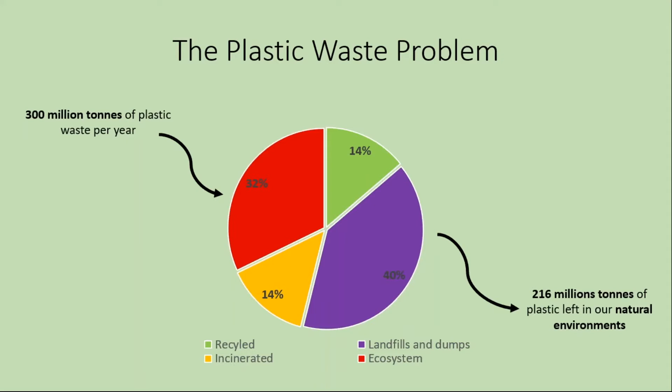72% of this plastic waste ends up in our landfills and ecosystems, with 14% being recycled and 14% being incinerated. Incineration of plastic is by no means sustainable, as more than 150 million tons of annual carbon emissions arise from this alone. Another environmental issue which requires serious attention is the depletion of natural river sand as a result of the ever-increasing demand of concrete, as shown on the next slide.

Around 30% of concrete comprises of natural sand. Some of the major consequences stemming from this overexploitation are the increase of the depth of our riverbeds, the lowering of the water table, and the intrusion of salinity into rivers. Not only does the use of sand in concrete affect the rivers themselves, but the transportation and mining of sand is also detrimental to the environment.

A new and emerging sustainable solution, which responds to both of these issues, is the use of plastic waste as a partial replacement for sand in concrete. Two different types of recycled plastic waste were used in this study, Resin8 and PET, as shown on the next slide. Resin8 is an innovative plastic aggregate which incorporates all the different types of plastic. PET is the most common type of plastic, and research has shown that PET is the most suitable type of plastic when used as a partial replacement for sand in concrete. It is for these reasons that Resin8 and PET form the basis of the study. Next slide, please.

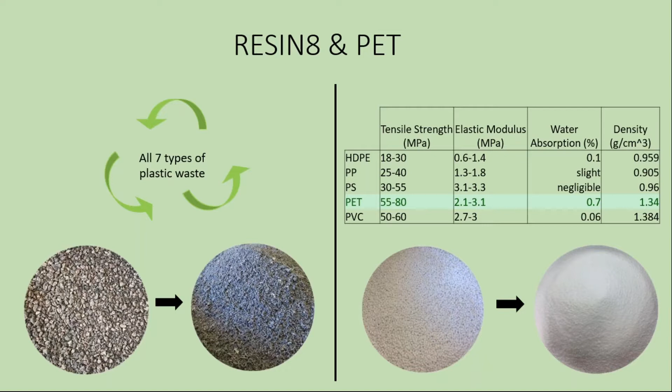Through the analysis of various articles, it is evident that the type of plastic, particle size, and replacement content influence the performance of concrete. At high plastic replacement content, it is found that there was a drastic decrease in the mechanical and durability properties of concrete. It is for this reason that Resin8 and PET were tested at small replacement contents of 5, 10, and 15% of sand by volume.

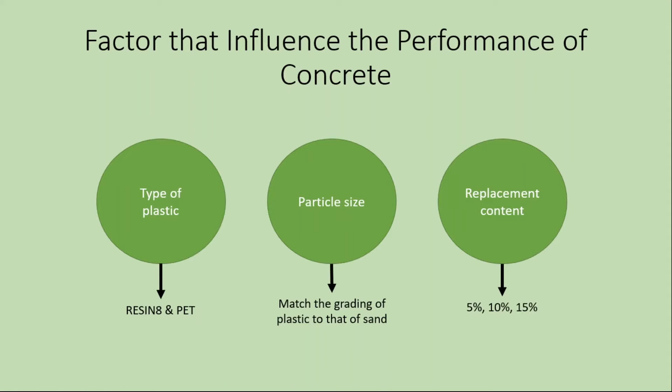The particle size and size distribution of the different plastics was also carefully considered, as it is important to match the grading of plastic to that of sand. The grading and surface morphology of the recycled plastics are shown on the next slide. As seen on the grading curve, PET achieved a grading very close to that of natural sand, which is very desirable. With regard to the surface morphology, Resin8 is seen to be a more heterogeneous material, while PET is seen to be a more homogeneous material.

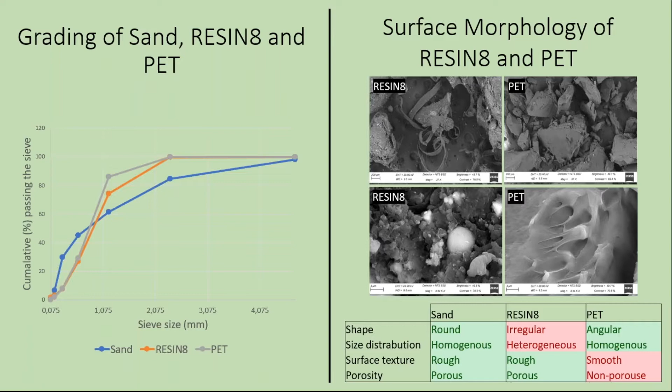Next slide, please. A number of different tests were performed to determine the workability, mechanical, and durability properties of the different concrete mixes. For each test that was performed, the concrete that contained the recycled plastic waste was tested against a reference mix, which contained no plastic. Some very interesting and exciting results were obtained.

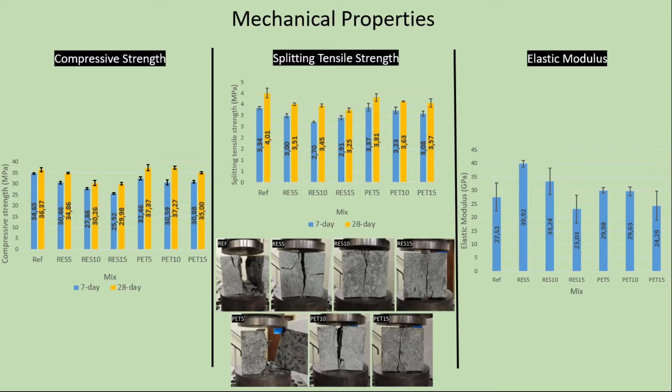The mechanical properties of the concrete mixes were determined by the compressive strength test, splitting tensile test, and static elastic modulus test. Looking at the compressive strength results on the next slide, it is seen that when compared to the reference mix, PET up to a replacement content of 10% increased the compressive strength of the mix. Importantly, all mixes were above the threshold for structural concrete in terms of compressive strength. This has the potential to save a huge amount of plastic, as both Resin8 and PET can be incorporated in concrete up to a replacement content of 15% and be used for all infrastructure.

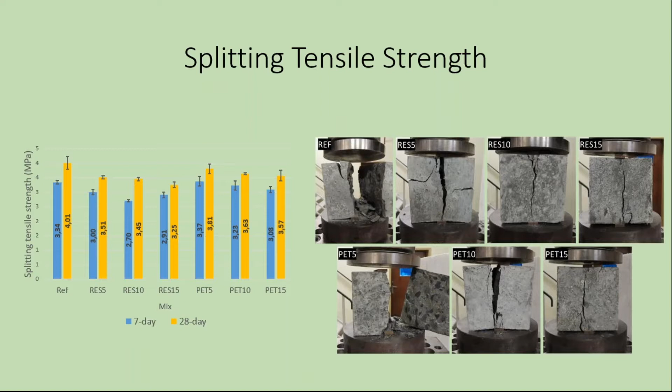Next slide, please. In terms of the splitting tensile strength test, incorporating PET at all replacement contents exhibited a stronger splitting tensile strength than Resin8 at a replacement content of only 5%. It was found that when the plastic content increased, a more ductile failure occurred, which is desirable. The elastic modulus results are shown on the next slide, and it was found that there was an increase in the elastic modulus of the concrete when incorporating Resin8 and PET up to a replacement content of 10%.

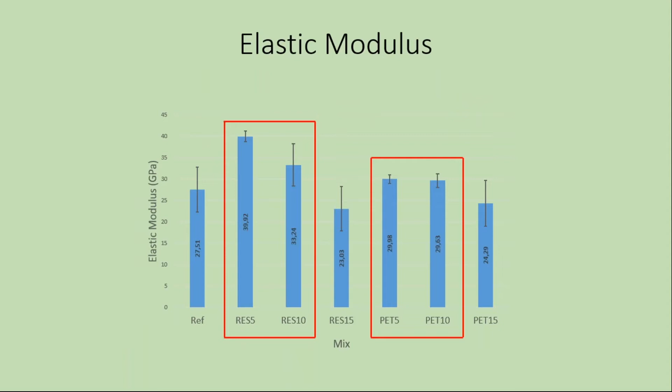Next slide, please. The durability properties of the concrete mixes were determined by the oxygen permeability index test and effect of elevated temperature test. The OPI test gives a measure of the resistance of the concrete to ingress of gases, liquids, and ions. PET was found to increase the OPI at a replacement content of 5%.

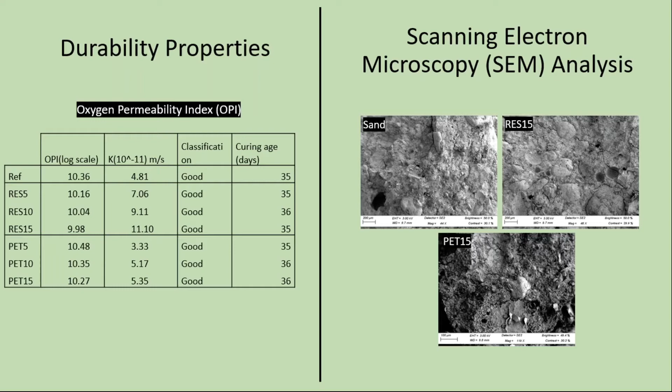The scanning electron microscopy analysis was performed to determine the surface morphology of the mixes, the interfacial transition zone, and the effect of elevated temperatures. Shown on the screen is an indication of the air void content in the different mixes, which in turn affected the strength of the concrete mixes. Next slide, please. In summary, it is clear that both Resin8 and PET are suitable as partial replacements for sand in concrete.

When looking at the overall performance of the concrete mixes, the optimum replacement content of resin 8 was found to be 5%, while the optimum replacement content for PET was found to be 10%. There is 10 billion tons of concrete produced every year. Incorporating plastic waste at a replacement content of 10% of sand by volume has the potential to divert 6.1% of the total amount of plastic waste produced every year for sustainable use in concrete.

It is also important to reiterate that both resin 8 and PET can still be used at a replacement content of 15% for structural concrete, meaning there is the potential to divert even more plastic waste from our landfill sites and ecosystems. The concrete which incorporates recycled plastic waste can also be crushed and reused at the end of its lifespan, meaning this recycling process is fully circular. This sustainable solution can thus be a huge step in combating the plastic waste crisis.

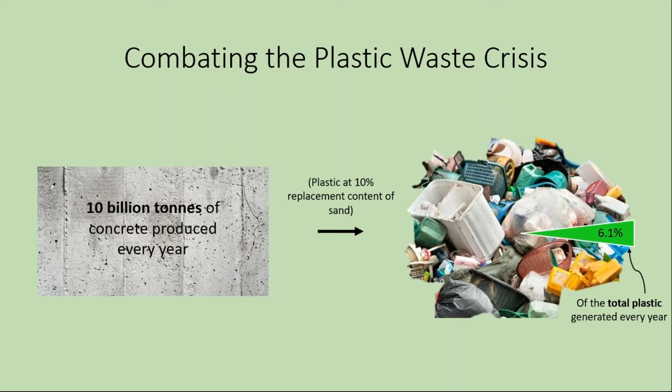Next slide, please. In South Africa's socio-economic context, there is the potential to create thousands of job opportunities, while the concrete that incorporates the plastic waste can be used to build fundamental infrastructure, such as homes, hospitals, schools, and roads. In responding to the plastic waste crisis we are currently facing, it is critical that any and all sustainable solutions are implemented with immediate effect. If we do not act now, the ramifications will exceed the boundaries of what human intervention can achieve. Thank you.

Thank you, Nina. That is very, very relevant and really close to our hearts on getting rid of a lot of the plastic waste.

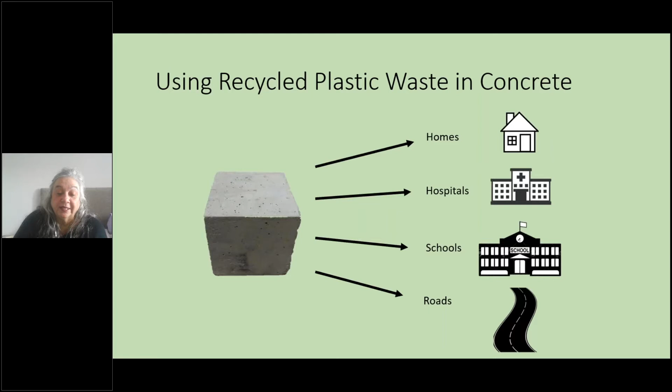Okay, we'll go on to the second place winner, who was Andrea Fiorita from North-West University, and he will present on the topic of industrial LED fixture. Andrea completed his bachelor's degree in computer and electronic engineering at North-West University in 2021. He's now busy with his master's degree at NWU. He loves the outdoors and gets on his mountain bike whenever he can. Hiking trips are also his perfect escape and a great way to behold the beauty of God's creation. And again, you can see the love of nature and the love of earth coming through. So, Andrea, over to you.

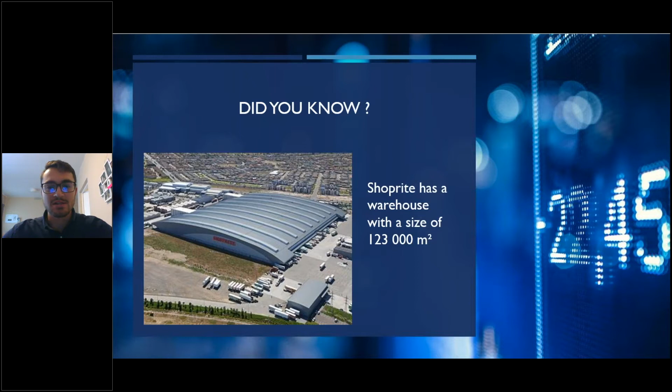Cool. Hi, everyone. I'm Andrea Fiorita, and I will be presenting the industrial LED fixture. Next. So, did you know that Shoprite has a massive warehouse with a size of 123,000 square meters? By doing a few calculations, you can calculate the energy usage of such a large factory. Next. From literature, you can see that such a large space uses almost 22.6 kilowatt hours per square meter annually, just on lighting energy costs. And with an electricity cost of R1.40 per kilowatt hour, you can calculate the amount. Next slide.

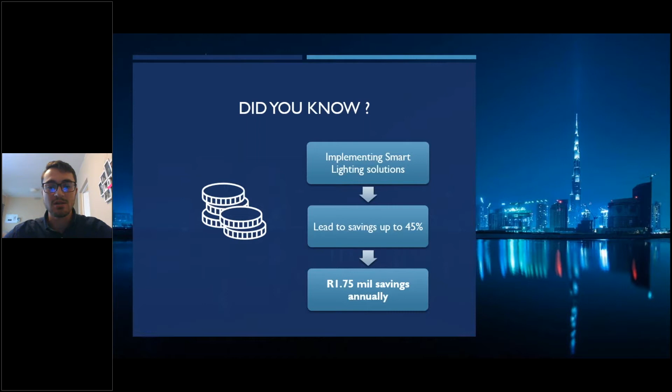So this all equates to almost 4 million rand annually just on lighting energy costs. So how can you save on energy? Next. You can implement a smart lighting solution, which can save you up to 45% on energy costs. And taking the previous example into account, it can save almost 2 million rand annually just on lighting energy costs. Next.

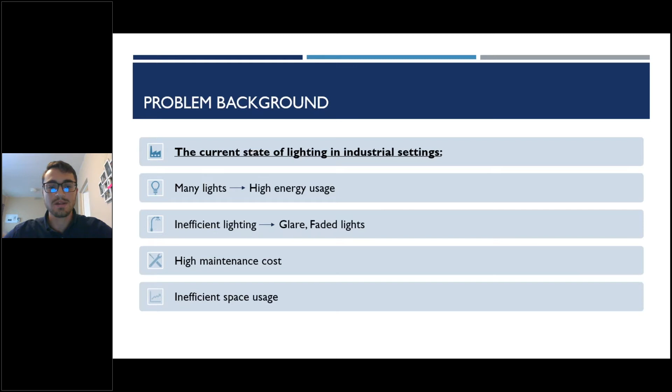So what is the current state of lighting in industrial settings? Well, firstly, there are thousands of lights, and each light uses a significant amount of energy. Then there's also inefficient lighting, such as glare and faded lights, which would decrease the productivity of employees. There's also a high maintenance cost associated with the current lighting schemes. And there are also, in such large spaces, places that are lit up but not even being utilized. Next.

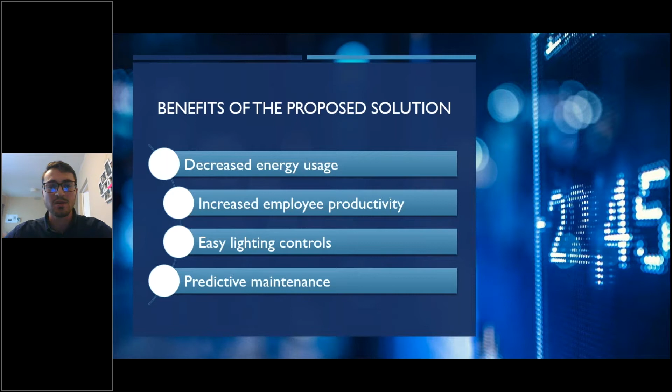So what may be the possible benefits of the solution? Well, mainly there'll be a significant decrease in energy usage, which should save on electricity bills. Then there's also an increase in employee productivity because the lighting is more user-centric. It also enables an operator to easily control the lighting in any environment. And lastly, it also enables predictive maintenance to save on the significant costs associated with corrective maintenance actions. Next.

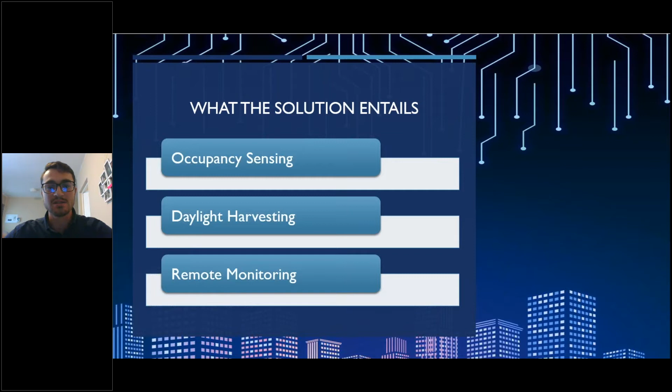So what would be the solution? Next slide. Well, the solution uses 3 techniques to save on energy. First, there's occupancy sensing, then daylight harvesting and remote monitoring. This will be discussed in the next slide. As you all may know, occupancy sensing is when a space is occupied, the lights are on. When a space is not occupied, the lights are off, meaning a significant amount of energy is being saved. Next.

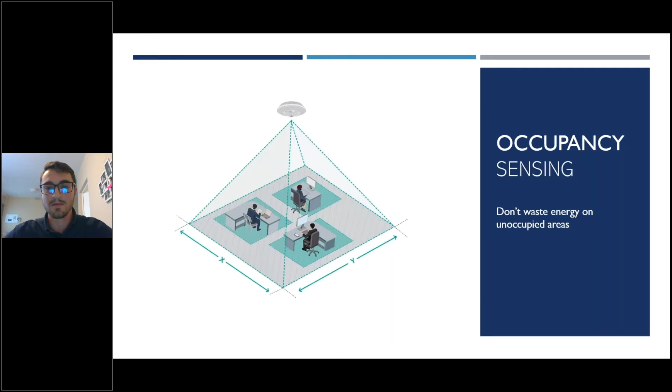Then there's also daylight harvesting. Daylight harvesting means that you utilize the incoming light from windows or a skylight to adjust the lighting in a certain space. So if there's a significant amount of light that comes in from windows, you don't have to use that much power on the lights. Next.

There's also remote monitoring. So this will enable an operator to easily control the lighting scenario in such a factory setting. You can also view system parameters from a remote location and adjust the parameters from any global position. Next.

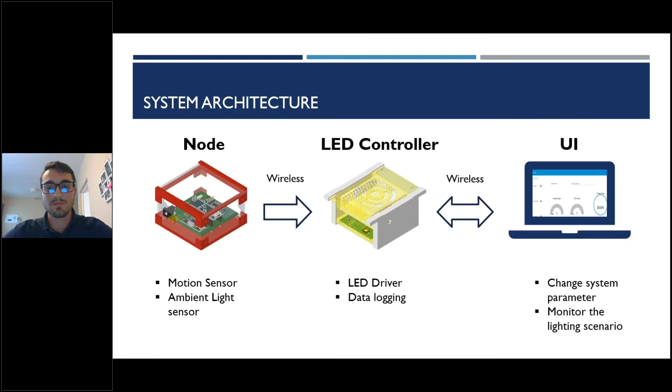Okay, so what is the system architecture? Well, it consists of a node, an LED controller, and a user interface. The node senses motion and ambient light. It sends these readings wirelessly to an LED controller. The controller will use these readings to dim the LEDs, and it will also log the data. It forwards the readings to a user interface. The user interface allows you to change system parameters and monitor the current lighting scenario. Next.

So with a focus on the sensory node, it has a range of 7 square meters and would typically be mounted on a workbench or wall. The motion sensor has a 360-degree detection range, and the communication interface also has a 10-meter range. Next.

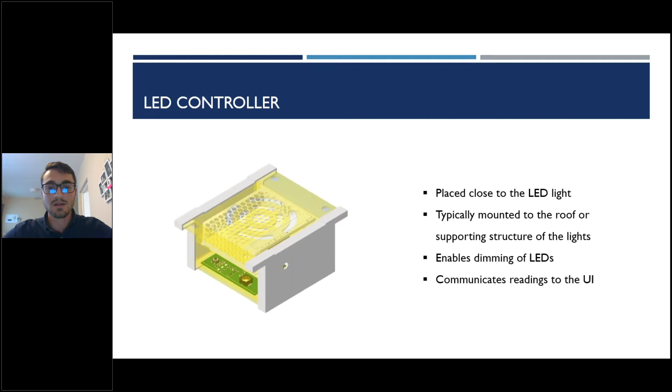Then there's the LED controller. The controller's main function is to dim the LEDs, and it would typically be placed on the mounting structure close to the lights. It communicates the readings to the user interface. Next.

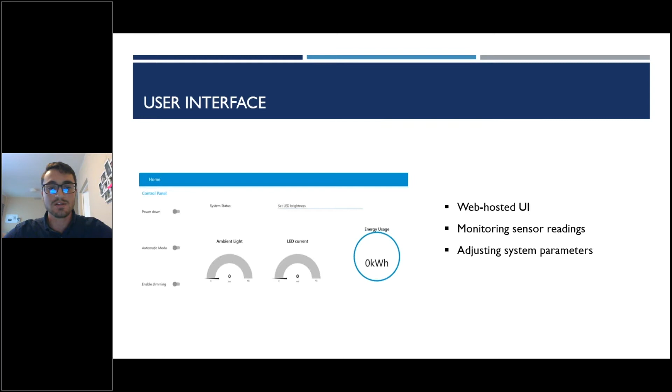So the user interface is a web-hosted user interface where you can monitor certain system parameters such as the ambient light and the current energy usage. You can also adjust certain system parameters such as the LED brightness. Next.

So yeah, to conclude, the LED fixture is a feasible option for any company looking to save on electricity bills. This is made possible by means of occupancy sensing, daylight harvesting, and remote monitoring. Next.

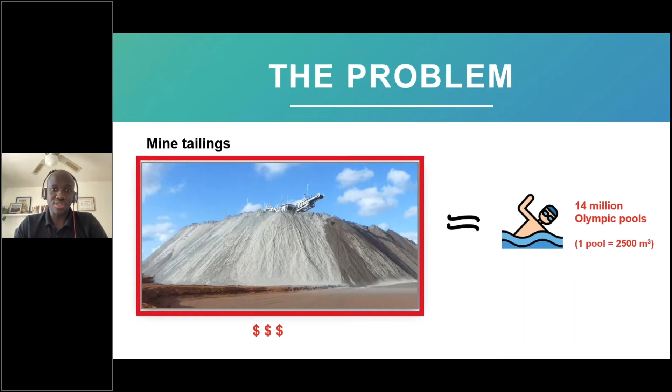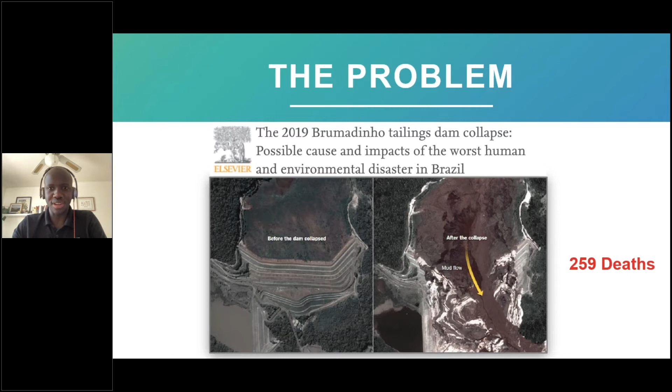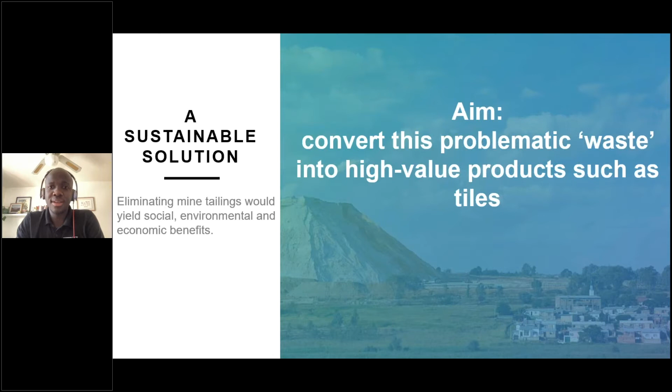On the next slide is an example of the catastrophic failure that regularly occurs. In 2019 in Brazil, 259 people died due to a tailings storage facility failure. The current solution is unsustainable due to the fact that these facilities need to be managed forever, and management does not eliminate risk. As shown on the next slide, the status quo is unacceptable. So my aim with this work is to convert problematic material into valuable products, thus providing a solution that meets the sustainability triple bottom line. The chemical process I use to do this is laid out on the next slide.

Geopolymerization leverages the unique chemical properties of mine tailings. Adding an alkali solution of high pH and curing at slightly elevated temperatures triggers a reaction that bonds the loose tailings material into a solid stronger than cement.

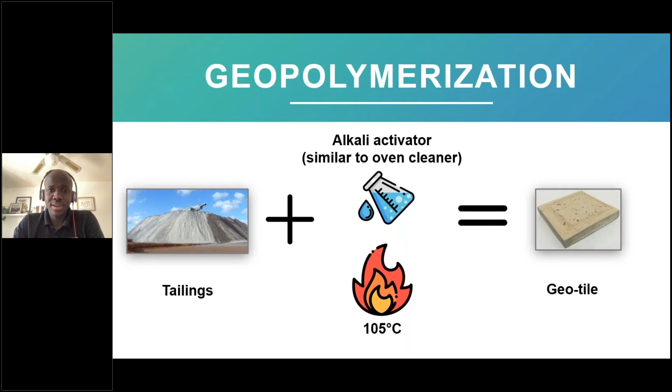The next slide overviews how I used this process to meet the objective. I'll begin with how I made the geotiles, the design chart I developed to meet the criteria, and then the testing methods that I employed.

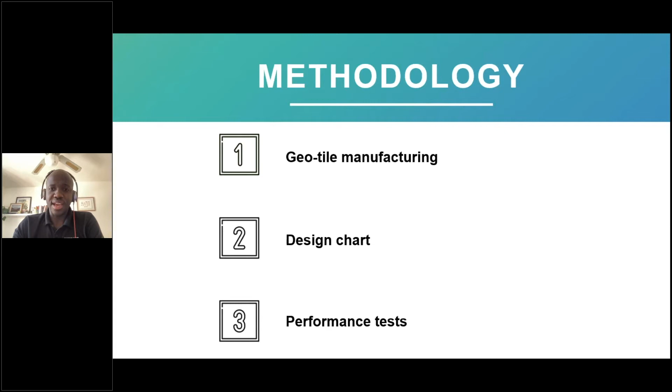The manufacturing process comprises 3 broad steps: mixing the tailings with a solution of sodium hydroxide, shaping the mixture with a hydraulic press, and then curing the tile in an oven.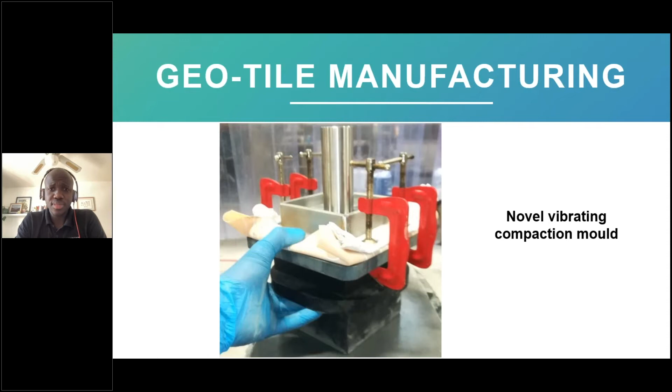On the next slide is the design chart I used to ensure that the tiles meet standard specifications. Everything to the right of the green dashed line meets the American standards for breaking strength, whilst everything above the red dashed line meets South African specifications for a calculated value called the modulus of rupture.

The blue lines predict the theoretical performance of tiles based on their thickness. This value is given in millimeters.

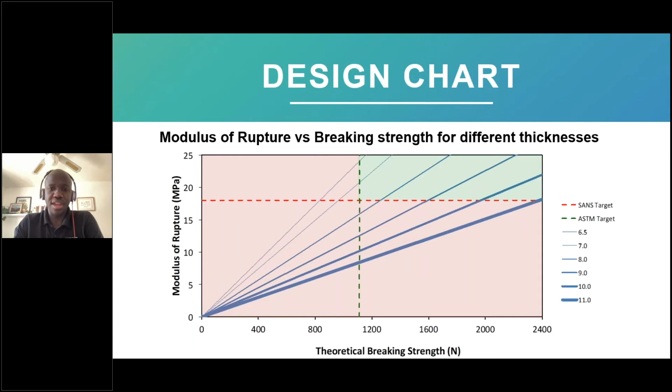Different tiles made will fall on this plot, and to achieve technical feasibility, we want a tile that falls in the green region at the top right of the plot, as that indicates the condition where both standards are met. To plot tile performance on this chart, the next slide shows the tests I employed.

Technical feasibility was measured by the breaking strength test, water absorption, and abrasion resistance tests, which I'll describe in a bit more detail in the next slides.

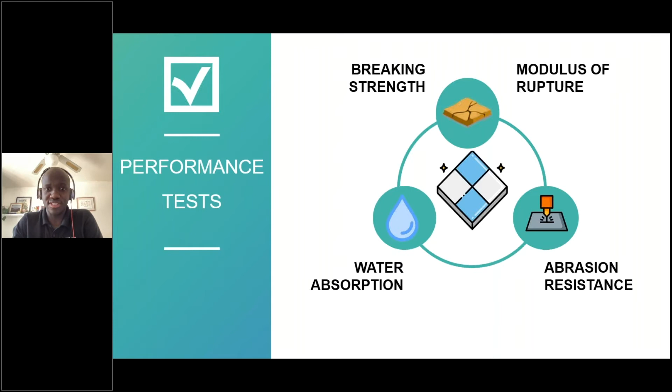Breaking strength is straightforward: you press down on the tile and measure the force to break it. This gives the breaking strength, and using a formula, you can calculate the modulus of rupture.

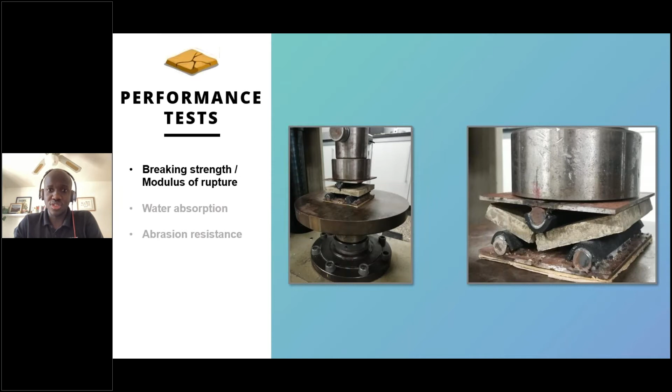Finally, the next slide shows the abrasion test. Sand goes into the white funnel at the top of the picture in the middle, and then pressurized air blasts the sand onto the tile at the bottom that's placed beneath the nozzle.

Results from this test show on the right that curing the tiles in the oven for 1 and 2 days did not meet the specifications, and that's why there are holes in those first 2 tiles. However, 3 days curing provided sufficient strength.

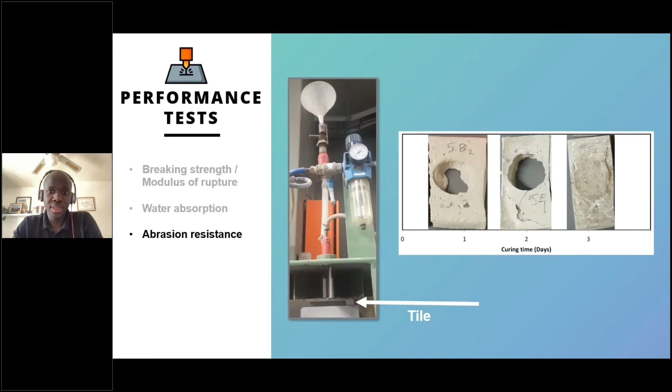In the next slides, I'll present the results of the previous 2 tests. I first found out how long the tiles needed to cure for. Immediately, we see that none of these tiles fell in the target region.

The square tile cured for 1 day met neither specification, whereas the 3, 5, and 7 day tiles beat the green American target line, but fell below the red South African target line. The triangular 3 day tile, however, is closest to the green target region in the top right.

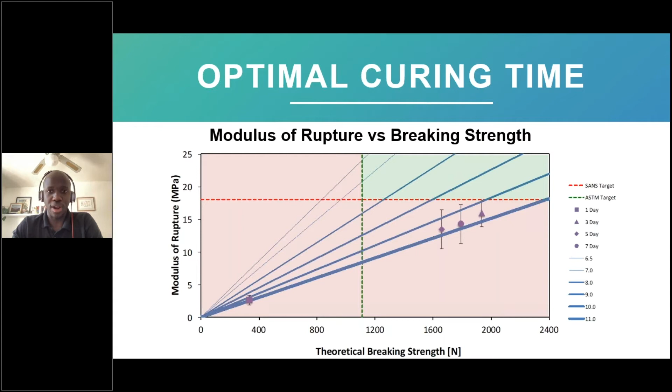The next slide shows what happened when I varied the tile thickness. We can see that neither of these 2 thicknesses fell in the green target region.

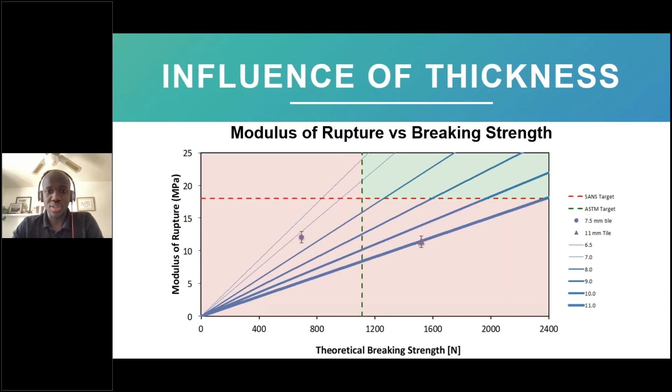I'm currently investigating other variables to produce geotiles that fall more comfortably within the target region for my master's research. Nonetheless, the results show that technical feasibility has been met.

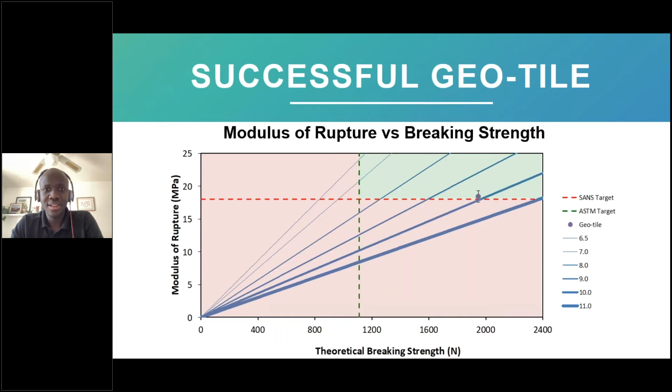So far, so good. But the real question is if we can make money from these things, which I'll address next. To answer this, I developed an economic model to compare geotile profitability to that of conventional tiles.

The primary material comprising a geotile is the mine tailings, which I've assumed to be free for this analysis. This is conservative because mines would be happy to have someone take the tailings off their hands. The costs I did consider are shown on the next slide.

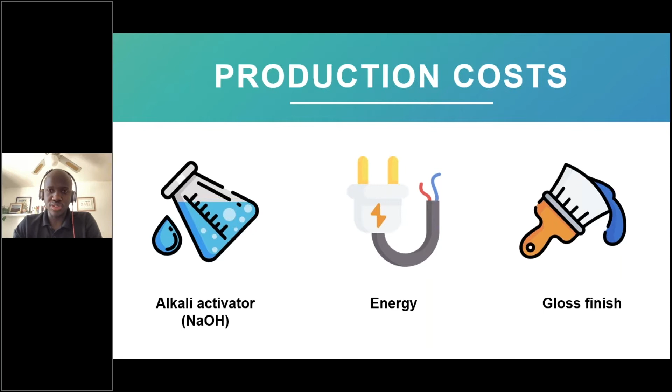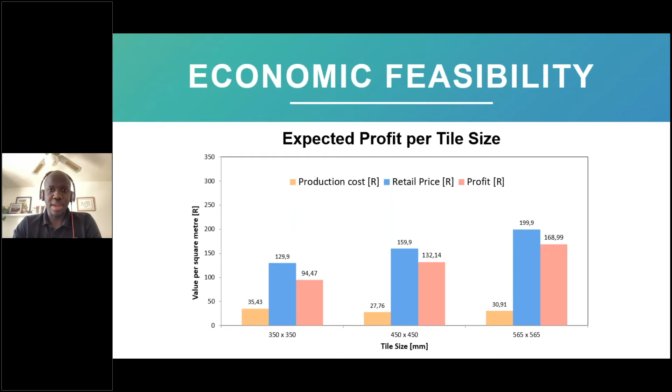On the environmental front, geotile production uses significantly less heat than conventional tiles, resulting in less embodied carbon. Lastly, reducing the prevalence of tailings waste will result in clean air and water.

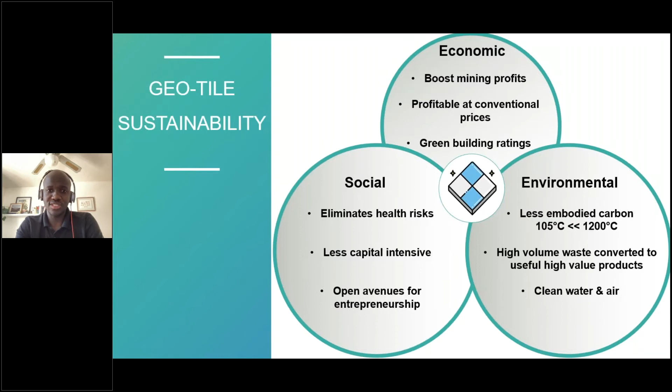So to conclude, I found that the unique chemical makeup of mine tailings can be leveraged to make an environmentally sustainable and profitable product, which addresses problems that contemporary mining brings to the fore. The manufacture of this product benefits society with respect to improved health and economic outcomes, and also opens doors for low-skilled individuals without access to significant capital to engage in entrepreneurship.

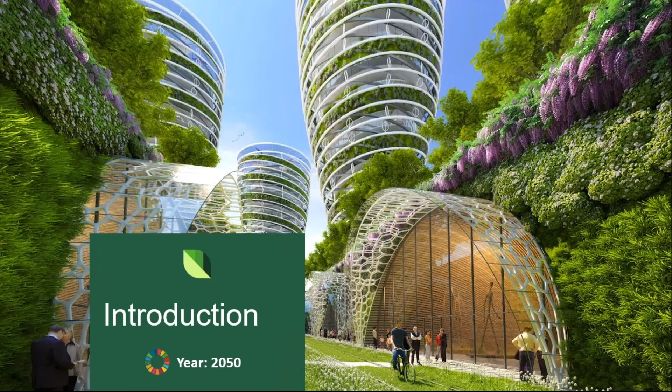All right. So the year is 2050, and climate neutral urban living has never been better. All new and existing buildings are net zero across their entire life cycle. The world's cities and towns are healthy and sustainable places to live. The world has worked together to exceed the goals set by the Paris Agreement, with global temperatures only rising 1 degree Celsius in the past three decades. The Earth and all that live on it are thriving. Next slide, please, Anya.

Back to reality. The year is 2022, and global temperatures are set to rise by at least 2.7 degrees Celsius before the end of this century, leading to catastrophic changes in global climate and life on Earth. Literature indicates that the global construction industry and its products is responsible for 16% of global water consumption, 30% of global greenhouse gas emissions, and a whopping 40% of global energy consumption. Next slide, please.

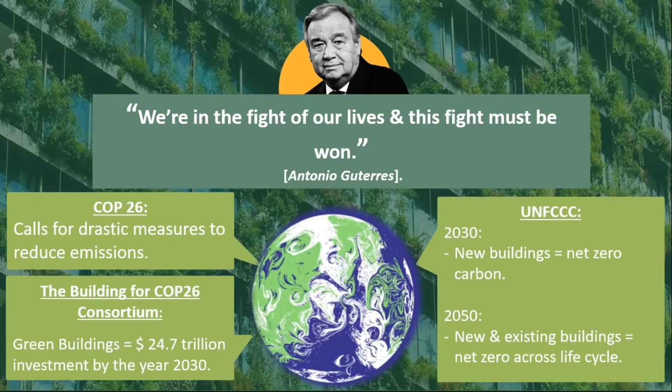These are rather alarming figures, but there is no need to fear when Antonio Guterres is near. In order to essentially save our world, COP26 calls for drastic measures to reduce emissions. The United Nations Framework Convention on Climate Change has set the goal for all new buildings to be net zero carbon in operation by 2030, and all new and existing buildings to be net zero carbon across their entire life cycles by 2050. This is where we pull back the curtains and say, enter green buildings, an estimated $24 trillion investment by the year 2030. Thanks, Anya. Next slide.

Green buildings are considered to be the primary solution to achieve climate neutrality in the built environment. Not only are they absolutely stunning to look at, but literature indicates that typical green buildings produce 34% less greenhouse gas emissions, consume 40% less energy, and 11% less water than conventionally constructed and operated buildings.

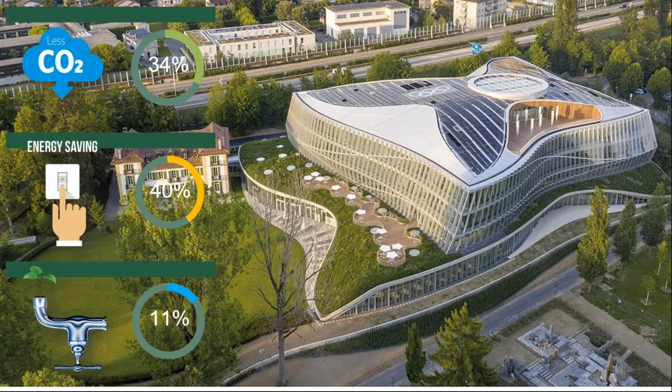Like all good things in life, green buildings come at a cost and not without a few complications. Literature indicates that the main factor hindering the widespread adoption of green buildings is the perceived higher initial cost associated with its adoption. Other relevant complications include the lack of awareness around the benefits of green buildings and the lack of green building knowledge.

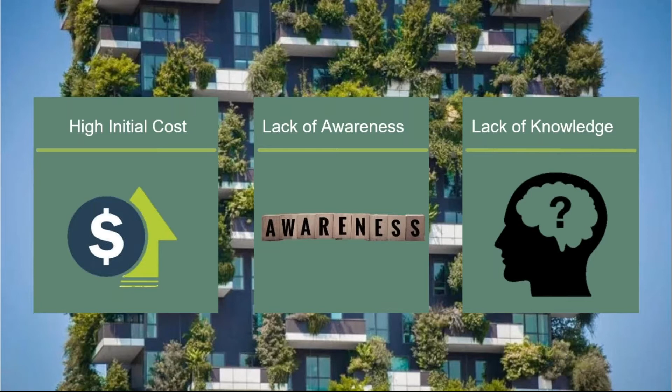This is where my research comes into play. The rationale for this research stems from the urgent need for a more climate-neutral built environment, as well as previous research stating that developers and investors find it difficult to justify the higher initial cost associated with adopting green building features. With this being said, my research attempted to drastically improve the grounds on which green buildings can be easily justified.

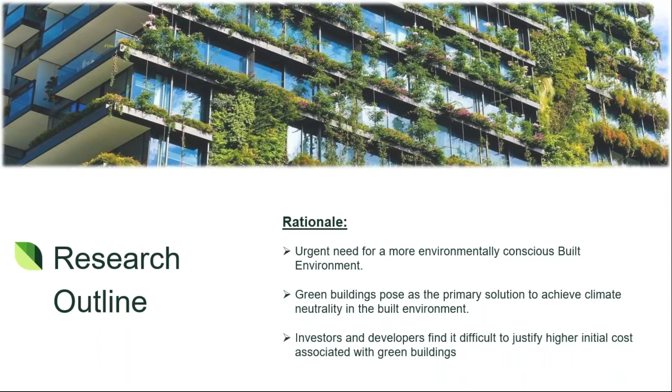So without any further ado, let's take a closer look at the findings of this research. The data collected is described with reference to 6 important key factors. The most popular response under each key factor is accompanied by a lightning bolt.

First up, we have the advantages of implementing green building features, with the most popular advantage being that the implementation of green building features significantly reduces energy and water consumption, which are both very limited resources in South Africa. This is followed by occupant well-being, raising awareness about sustainability, increased occupant productivity, green leasing options, and promoting participation in sustainable practices among building occupants.

Then we move on to the different types of green building features that have been adopted in commercial buildings. The most popular green building feature was found to be solar PV systems and smart LED lighting. These are followed by sustainably sourced timber, natural ventilation, eco-bricks, natural daylight optimization, rainwater harvesting, desalination plants, grey water treatment, seawater cooling, engineered facades, and water-wise sanitary fittings.

When we look at solar PV plants as a green building feature, it was evident that economies of scale were achievable. In one case study with a relatively small solar PV plant, the interviewee reported a 20-year payback period on their investment, with their plant only able to supplement around 10% of annual energy consumption. Another case study boasts one of the largest solar PV plants in a commercial building within South Africa. The interviewee from this case study reported a mere 4-year payback period on their investment, with their plant supplementing their annual energy consumption by up to 65%.

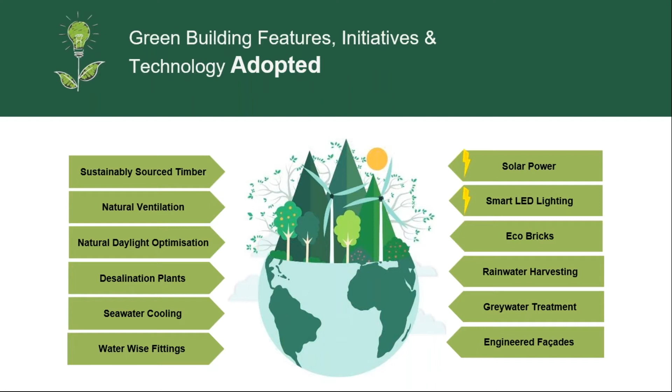So onto the barriers that hinder the adoption of green building features. The most dominant barrier is the perceived higher initial cost of constructing a green building, as well as the issue of split incentive, where a building owner sells the building straight after construction and is not able to reap the many long-term benefits of owning a green building. This is followed by barriers such as lack of green building knowledge, lack of experience in the industry, and a building's physical inability to accommodate green building features.

And now we have arrived at the ever-important potential to reduce costs. The chart currently displayed on the screen illustrates the actual reduction in operating cost per square meter of gross lettable area as different green building features are implemented. Each bar represents a stage of green building feature implementation, with the details of the specific stage presented in the legend below. Each green bar represents how operating cost per square meter gradually decreases over each respective stage.

The monetary value of operating cost can be found at the bottom of each green bar. When we look at each orange hatched bar, it represents the cumulative percentage decrease in operating cost from stage 1. So when we look at it holistically, the figure shows that the implementation of green building features has the potential to reduce a building's operating cost per square meter of gross lettable area by almost 60%.

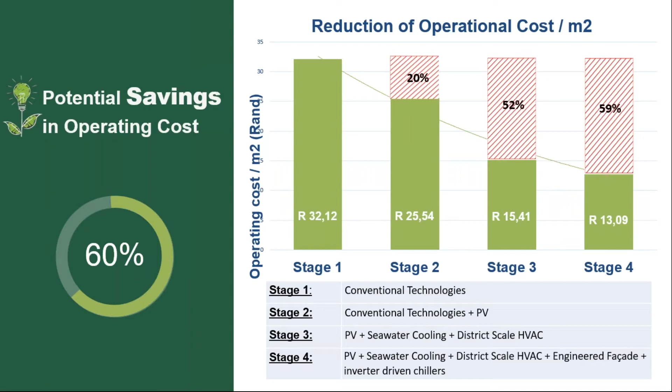Although I would thoroughly enjoy speaking with you for the entire day, we have reached the home stretch of this presentation. As I previously mentioned, the aim of this research was to build better grounds for green buildings to be seen as an easily justifiable investment.

Based on the findings we have just discussed, there are three main concluding remarks I want to draw your attention to. First, it is quite evident that the benefits of green building features heavily outweigh any of the drawbacks, and that these benefits are not only environmental in nature, but also extend to the social and economic spheres of sustainability. Social benefits include, but are certainly not limited to, increased occupant well-being and participation in sustainable practices. Economic benefits include, but are not limited to, significant savings in operating costs, higher rental rates, and higher property value.

Next, it is evident that the implementation of green building features has a significant potential to reduce the operating cost of green buildings by up to 60%, a very enticing figure given the ever increasing price of electricity in South Africa. When taking all the key findings into consideration, it can with the utmost confidence be concluded that the adoption of green buildings and the features that go with them pose as a one-stop shop solution for many of our sustainability issues faced in the built environment and across the globe.

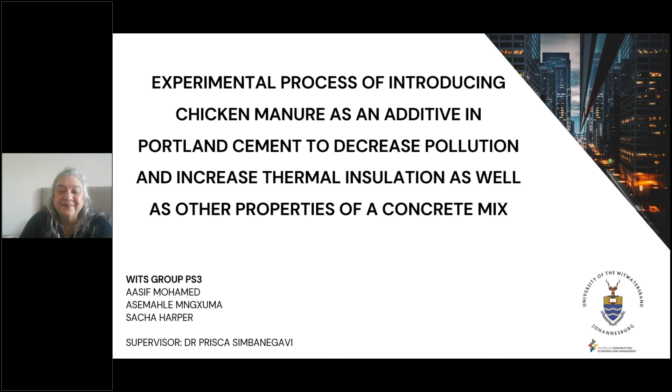The inadequate management of chicken manure is a global issue, whilst toxic waste in the form of carbon dioxide from cement is released into the environment annually. We saw that a more improved strategy for managing chicken manure as well as cement production is needed. Our research sought to reduce costs and carbon dioxide emissions by substituting cement with chicken biomass and other recyclables such as pulverized fly ash and ground granulated blast furnace slag.

Next slide, please. The question is, how can we use these ingredients to produce a cheaper and more environmentally friendly concrete mortar? In this next slide, we will outline the objectives of our research, which are to determine the rates of increase in cement and concrete prices in South Africa, analyze the environmental effect of cement production using literature, explore the application of biodegradable biomass as a concrete additive, and calculate if chicken manure can be put in concrete to make it more sustainable.

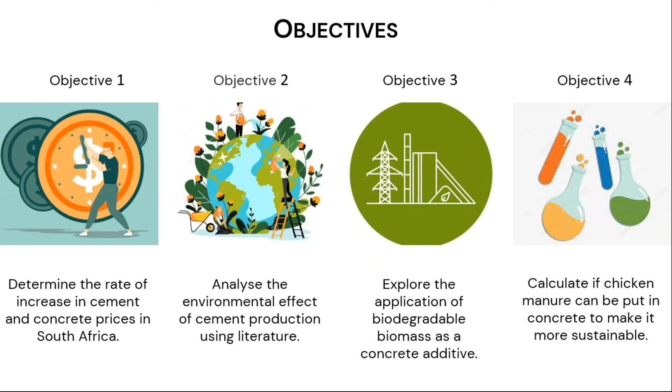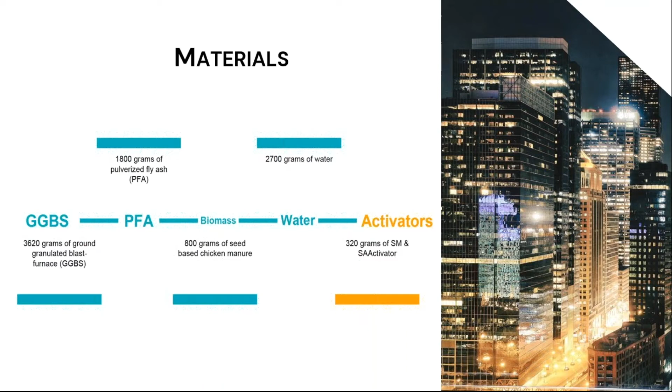In the next slide, we'll outline the materials that we used for our research experiment, which are GGBS, PFA, chicken biomass, which included seed-based chicken manure, water, and activators, which were alkali-based. In the next slide, it will detail our design mix for the various mixes we did in our experiments. I will now hand over to my colleague to talk about our methodology and protocols in the next slide.

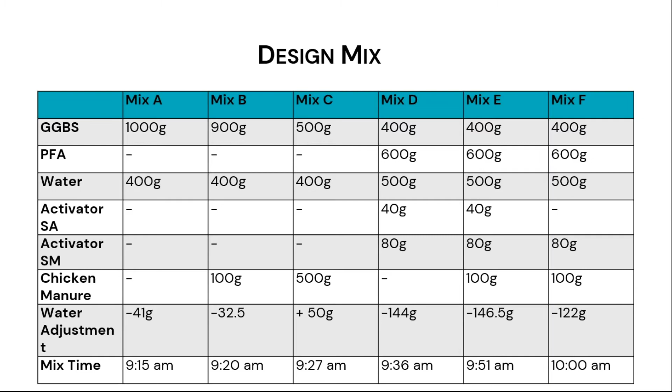So our methodology and protocols, it is essential to follow the protocols if someone would like to attempt this experiment in future. What we did first was we dehydrated all the materials, as moisture carries weight and we need to obtain the most accurate results we can.

The ground granulated blast furnace slag, pulverized fly ash, and chicken manure were placed in a general mixer, a blender. We created 6 samples, each with different plastic bowls, and ingredients were measured and placed in each. According to the design mix, each had different ratios. It is essential that when combined with water, ingredients are mixed well to reduce lumps in the mixture.

We used isoprisms, 0.24 cubic meters in volume, sprayed with spray and cook and filled with the mix. The molds were filled and placed on a vibrating table to minimize any bubbles formed in the mixing process. Plastic wrap was placed on top of the molds so the concrete could cure in its own moisture, trapping it in.

Once it was curing, we placed it in a temperature controlled bath at 24 degrees. The air in the room was also temperature controlled at 24 degrees.

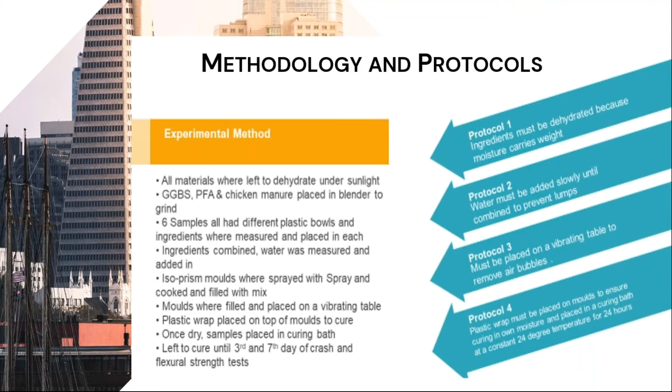From there, we did crash tests on day 3 and day 7 of our experiment, performing compressive and flexural strength tests at each stage.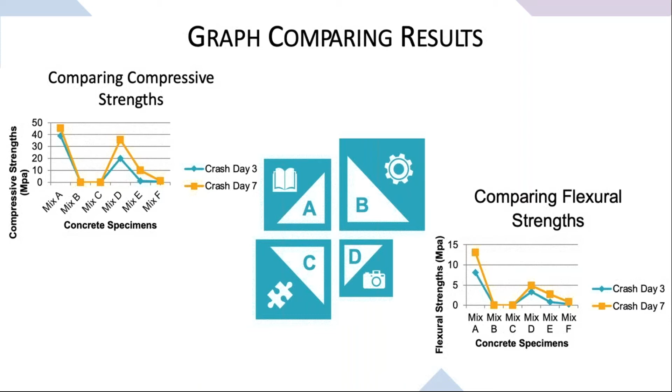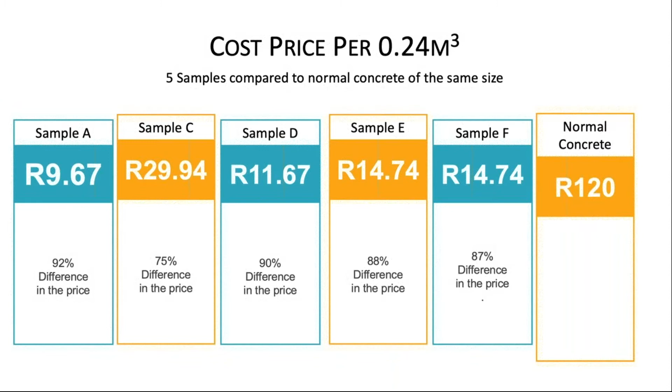Our cost per 0.24 cubic meters: we used the current rate that normal concrete is being sold at for 0.24 cubes, and used that result to calculate the price difference for our samples, looking at an average of 80% cheaper than normal concrete.

These are the cost differences in percentages achieved for each sample mix. As you can see, A was the strongest performing sample, achieving 92% cheaper than normal concrete. Mix D was 90% cheaper, and mix E was 88% cheaper.

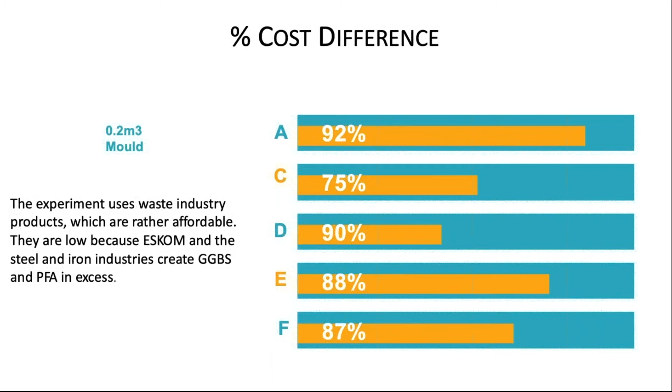In conclusion, we found that chicken manure can be used as an additive in concrete mortars. We also found it performs better when mixed with PFA and GGBS. However, we could not determine whether it performs better over time.

That means we would have to do the experiment for a longer period of time. We only managed to do it for 7 days because we didn't have that much time.

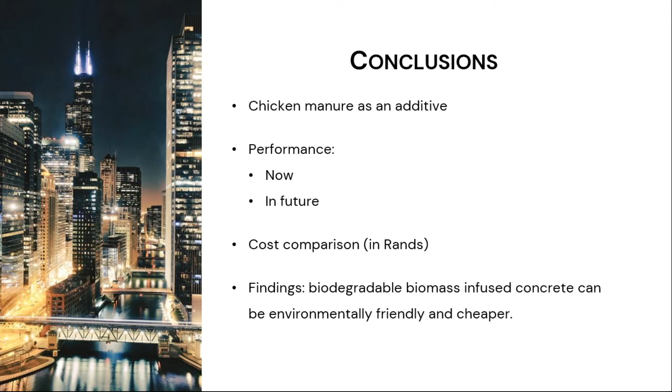In terms of the cost comparison, we were able to compare the different mixes, even though it was challenging to measure it in rands. This study found that biodegradable biomass-infused concretes can be environmentally friendly and cheaper.

For our contributions, our research is an alternative approach to existing waste management strategies. It aims to help various stakeholders, firstly, to reduce waste byproducts from reaching landfills, freshwater dams and rivers.

Secondly, to be an investment opportunity to upskill the education sector in terms of trade skill development for those who cannot afford higher education. And lastly, it aims to create new job opportunities that could ease our very high unemployment rate.

For our recommendations, we have made the following suggestions. Mix A at 45 MPa is our strongest performing sample, therefore it can be utilized in commercial and civil building works for structural columns and beams.

Mix D at 35.5 MPa can be used in housing projects, helping alleviate the housing backlog in the country and assisting the government in creating environmentally sustainable and affordable housing. Mix E at 10 MPa can be used for non-structural works and for paving blocks as well.

Finally, we recommend that mixing chicken manure with GGBS and PFA should be the way to go, because it increases the strength of a concrete mortar and is also environmentally friendly and sustainable.

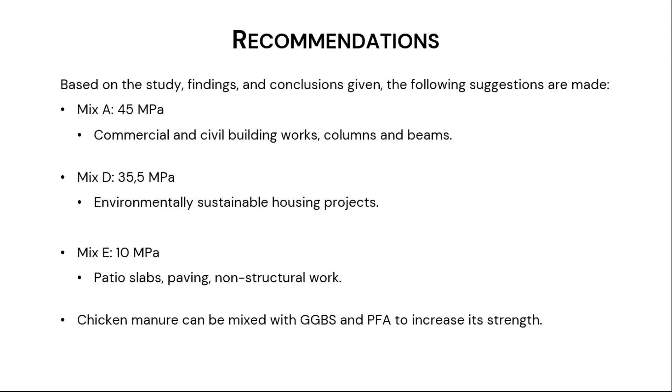And then in terms of industry alignment, our research aligns with the Paris Agreement, which spoke on reducing greenhouse gas emissions that cause global warming. And it also aligns with COP26, which requires countries to limit their temperature increases well below 2 degrees and reduce coal usage so to inhibit climate change from carbon dioxide emissions.

Lastly, our research also falls under the Sustainable Development Goals to transform the world, which are goal number 12, responsible consumption and production, as well as goal number 13, climate action.

Thank you so much for your time. And lastly, I'd just like to ask you this very important question of what are you going to do about it? Thank you.

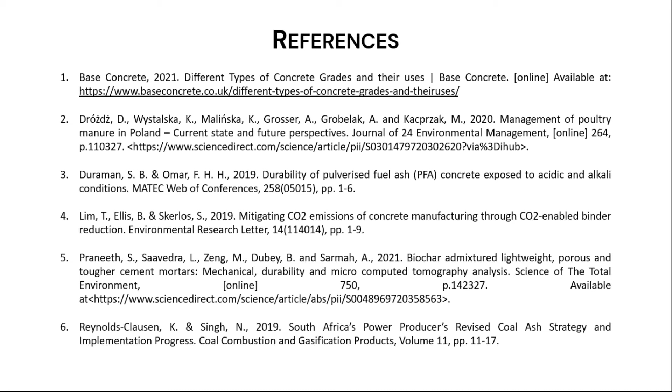Thank you very much. That is a very important question. There's a saying like, if not now, when? And if not you, who? So, great question. Cool.

We are on to the first place winner of the property side, and it's Tristan Fernandez, and he will enlighten us on a life cycle cost analysis of developing high-rise, sustainable, innovative, affordable housing in South Africa. And as I said, he's a winner of the property category.

Tristan completed his honours in property studies at UCT in 2021. He's currently completing a 6-month internship at Equites Property Fund in Cape Town. He's a confident, accomplished, and highly motivated property professional, skilled in forecasting cash flow statements and identifying new market opportunities.

He's eager to utilize and apply the knowledge he's acquired during his year of studying in a way that can benefit real-world problems through PropTech and smart buildings. And yeah, affordable housing, definitely a real South African problem. So, Tristan, on that note, I'm handing over to you.

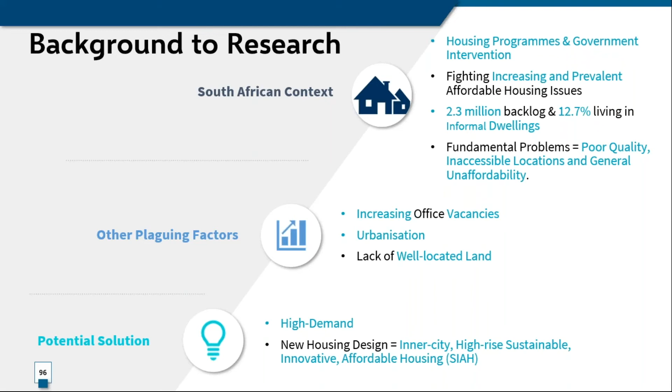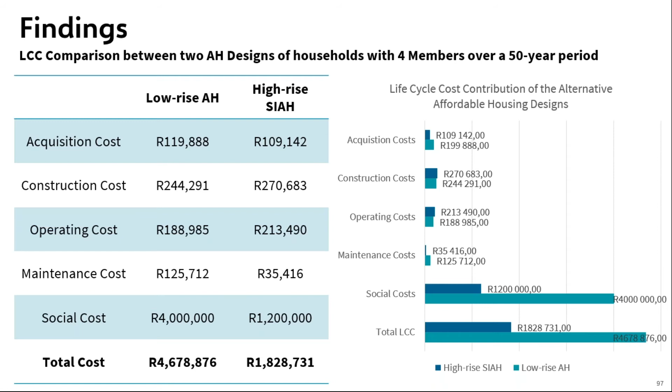However, in contrast to this, the cost items of acquisition, maintenance, and social costs illustrate that the high-rise design reflects net decreases. Next slide, please.

Here, these pie charts show the cost savings a household can achieve for the respective cost items across the different housing designs. The cost items of construction and operating costs increase household expenditure, represented by the -11% and -13%. However, the cost items of acquisition, maintenance, and social costs show decreases in household spending, shown by the 9%, 72%, and 70% cost savings, ultimately resulting in a total cost saving of 61% per household over the entirety of the building's lifespan. Next slide, please.

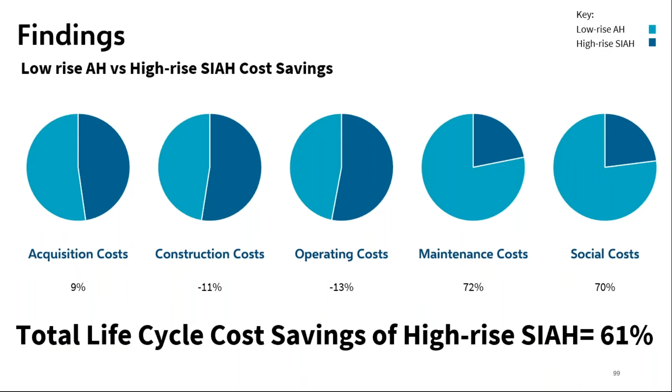To summarize, what is most important to note from this research is that the cost items of construction, acquisition, and operating costs are within relatively similar brackets of each other, plus or minus 10% across both designs. However, it is the cost item of social costs that results in being the main contributor to overall household costs, showing that the common conception that construction costs are the costliest item to a household is false, and that when adopting a life cycle cost perspective, it is in fact the social cost, which relates to traveling and value of time expenses, that impacts a household most significantly.

Additionally, the significant difference in the life cycle cost of this particular cost item between the low-rise and high-rise design illustrates that both these elements are heavily influenced by location. Therefore, as a direct result of increased accessibility in that of inner-city high-rise, sustainable, innovative, affordable housing, household costs are significantly reduced. Next slide, please.

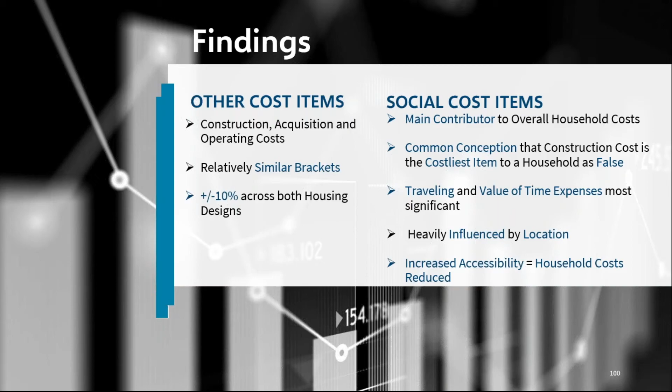In concluding, often housing affordability is solely looked at through the lens of current construction costs. On this basis, affordable housing is seen as a risky and unfeasible asset class for both the public and private sectors. However, through adopting a value-based approach, one is capable of looking at housing from a life cycle cost perspective that encompasses more than just the physical building. In this way, uncovering that significant cost savings can be achieved, general affordability of households positively influenced, and overall household wealth increased, purely through better located,

sustainable, innovative, and affordable high-rise housing, as well as deriving additional benefits, such as significant reductions in CO2 emissions, increased safety and security for households, better social cohesion and use of shared infrastructure, and ease of achieving Green Star ratings. In this light, households no longer face a trade-off between housing and location, therefore making affordable housing a feasible investment in all aspects, and allowing government, developers, and investors to tap into this market through leveraging this increased affordability. Thank you.

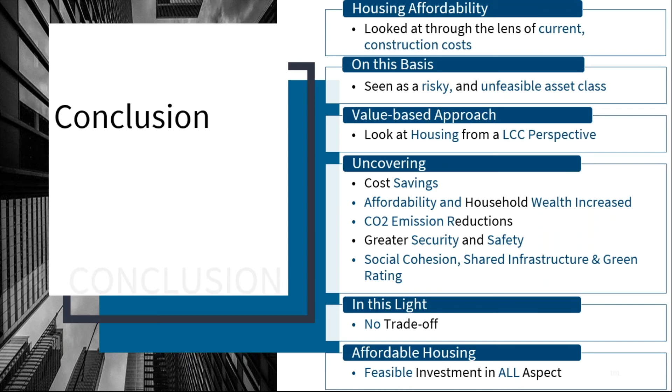Thank you, Tristan. Very, very interesting. I would also like to point you to, we did a project last year with a university, and it was around carbon saving of people living closer to where they work and where they study. And it really is a much smaller carbon footprint. So that would add to what you've already concluded.

So, can I ask our panelists to come back so that we can perhaps ask some questions that have come up? Thanks, Asif. Waiting for everybody. Sasha, Barrett. Oh, are we all here? Perfect.

I have a question for Barrett from the audience. Barrett, why are hydroponics and aquaponics not included in your possible solutions which can further reduce emissions? What are your thoughts on that? Yeah, just to generally answer that question, I would have loved to explore all the possible solutions, but unfortunately for honours research, you have a very limited time, and you need to confine your scope to a more specific direction.